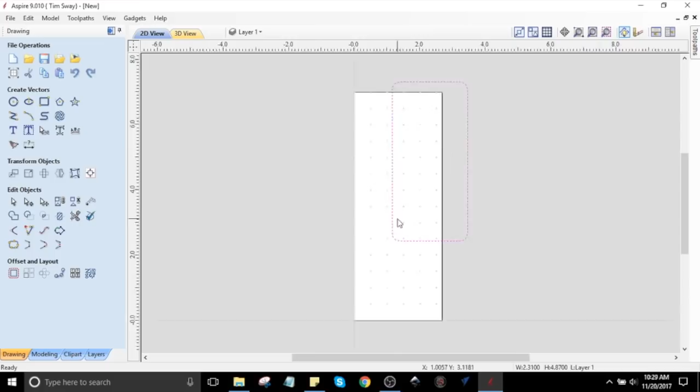Ideally, I want to be able to use the newest version of Aspire to its fullest potential and do 3D carving on two sides of the same piece of wood.

I started simple by modeling an iPhone for my 15-year-old niece Hillary. I thought I would just get the dimensions offline and make a very simple shape, some very mild cuts, and give her something that she could hold instead of the real thing to give it a break every once in a while. And I used this piece of wood, which is a piece of reclaimed decking furniture, I believe it to be teak, that I had gotten from her father.

So it was a pretty simple model, really too simple for what I'm trying to do, but it was a good place to start. I put my wood in, I set up that little fence to line it up and find my zero, and just started carving.

First I did a rough cut with a 1/4-inch end mill, and then I switched to an 1/8 ball nose end mill to do the detail work. I then also used a V-bit to carve in some initials.

I left some tabs that I could just cut with a razor blade, and I was able to pop that piece of wood right out.

This wood was a little too light and too splintery for this. I tried doing some repairs on it. There was a spot that chipped and sanded it up, and it came out okay. The file worked properly and it all looked good, but it was a little too light and a little too thin. I wasn't happy with it. I thought she needed a more substantial piece of wood that would make it feel more like an iPhone. I finished it anyways.

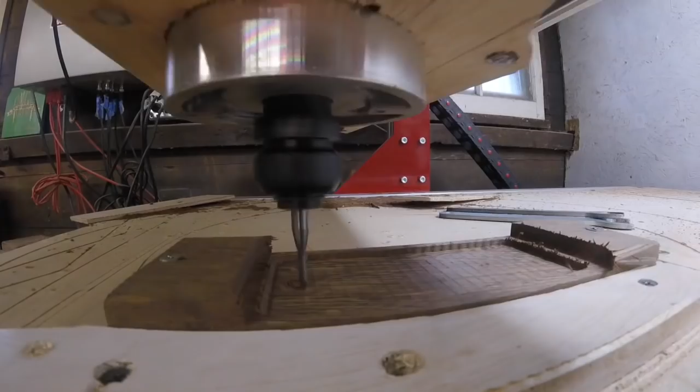And then I dug into my pile of wood I got from my friend Dylan, whose father was a guitar maker, and he gave me a bunch of these little just pieces of exotic wood. So I don't even know what this is, wenge or something, I'm not really sure, but it was just a little denser and firmer, and I had this piece that was pretty much the perfect size.

And I didn't carve the initials in this time because I didn't like the way they looked, but this denser wood came out a lot better looking. It feels more like an iPhone. There was no splintering. It was definitely worth doing again. You can see the difference here.

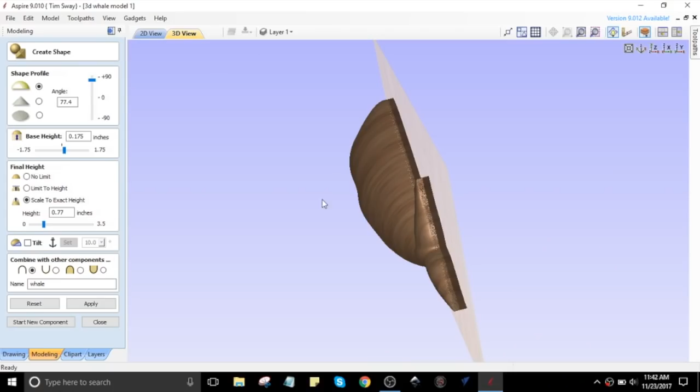Now it's time to move on to full two-sided 3D carving, and I decided to make a whale, of course. I found a very simple vector, just that outline drawing that you can see there online, and just copied that, and I decided to try and make that three-dimensional.

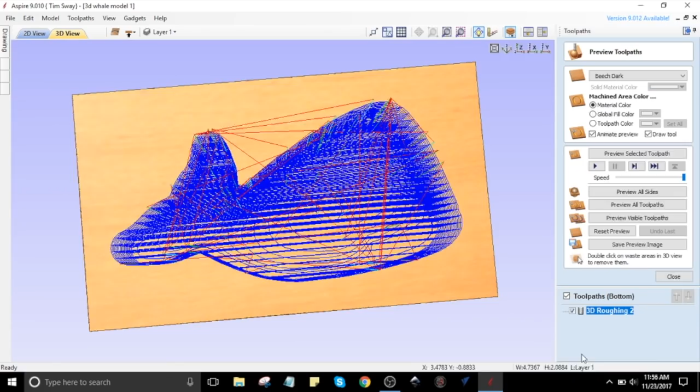It wasn't too hard to blow up the one side. Basically what I just did is created it all on one side and then mirrored it to the other. What I did have trouble figuring out how to do was to get tabs in there so it wouldn't just fall through and get it centered in the block of wood. As you can see, I was having a little bit of trouble there.

And I decided to use some of the boat wood that I got from Levi from the Ernestina. Since it's a whale, I thought I might as well get a piece of wood that might have actually seen a whale someday. I began to prepare the wood, and it was right about here that I realized I don't have to do it this way. I have bigger tools to handle the job, so I squared it all up with some electric tools instead.

Now this is where my inexperience with CNC really starts to show, and I start to make some mistakes, so pay attention. Maybe I'll save you some trouble in the future.

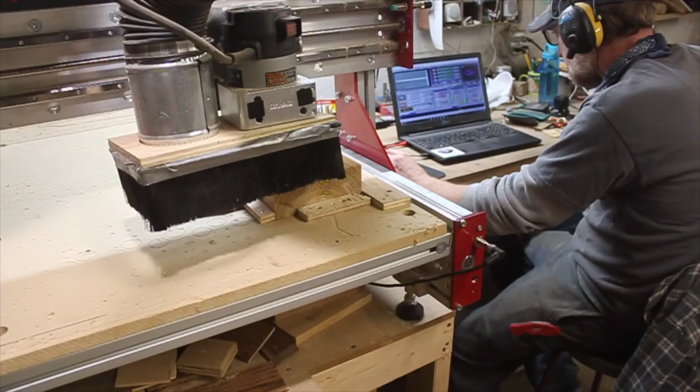First I created that little fence, and I used a little piece of two-sided tape to stick that in there, because I wasn't quite sure if I was going to have room to screw it down yet. I wanted to at least start cutting it before I popped any screws in, to make sure they weren't going to get hit by the router blade.

So I do first a rough pass where I use the 1/4-inch end mill to get it all roughed into shape, as you can see here. And now I know where I can put my screws, and I'm ready to do my final pass, which I use an 1/8-inch ball nose bit for, which then goes and does all the final detail and shapes.

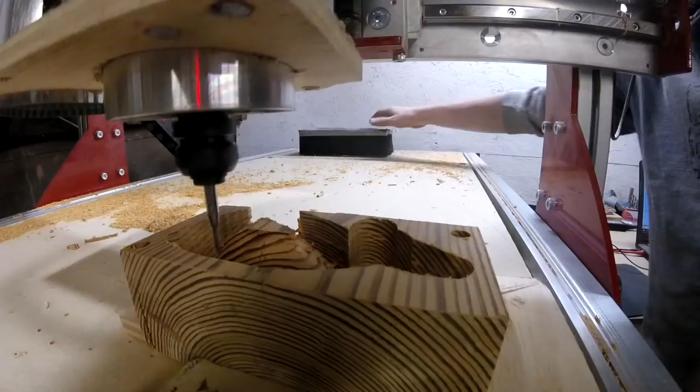I want to point out here that I'm not going to fully explain all of the problem solving that I had to figure out in the software, because there are so many better tutorials on the Vectric YouTube channel and other YouTube channels where they really explain how to use the software better. I'm trying to just sort of show the real world side of it. I'm not quite qualified to do that type of talking yet.

I just realized now that this block was supposed to be 3.5 inches, not 3 inches. And I thought it was interesting how it was cutting off here because it didn't on the model, but that's okay. The only thing it affected was my tab. The whole sculpture still fit inside.

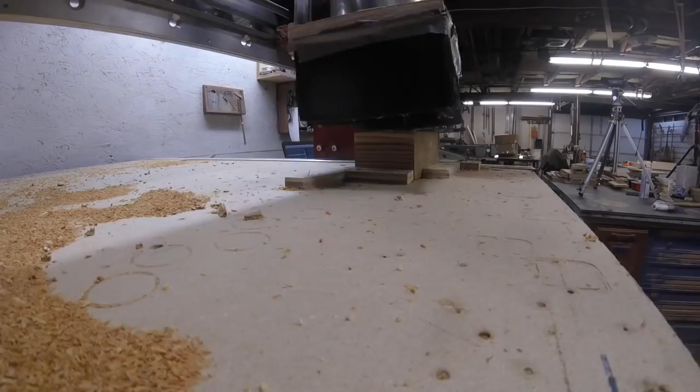This is a trick that I learned from Vectric, because if you drill those 3 holes into your block and then you drill them again into the wasteboard in reverse, you can flip the wood upside down and it will perfectly line it up. So I've got that down, but here you'll see in a second where I obviously didn't have my tabs right on my whale.

And as I'm starting to do the final cut on the second side, there it goes, it breaks free, and now I'm just cutting air. But I don't know this, of course, because I'm not watching.

I just walked over and realized that this is the first side, and then it fell. The tabs I made weren't big enough to hold it in place, and it just completely fell. So I've been cutting air for the past 10 minutes.

So I tried again. I made bigger tabs, and you can see that one was kind of useless, and those actually kind of worked. But then what I also did is I just sort of fudged my depth to give myself a little bit of wood here that I could then cut out on the bandsaw and play it safe, because I have to sand the tabs in anyways. I might as well sand all that in.

But what I'm thinking is, what I just did is cheat, and I figured out a solution by using hand tools, but I didn't actually figure out how to use the software properly yet, which bothered me. But I moved on to the good wood anyways, thinking I might have it figured out by the time I was ready to do that.

So this is some really beautiful red mahogany that's reclaimed also from the Ernestina. Thanks again, Levi. And I wanted to make the whales out of this.

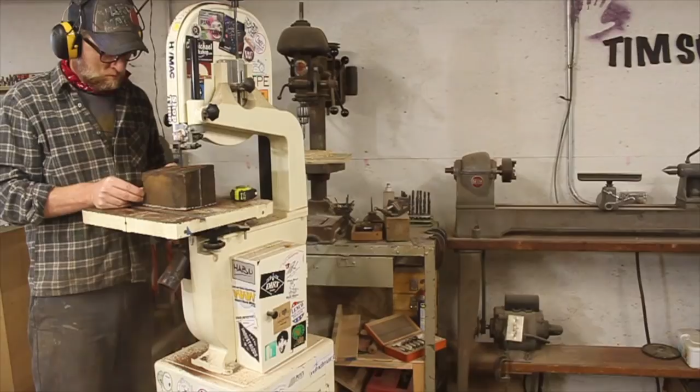And right about here is where I start thinking how people say using a CNC isn't real woodworking. I don't get it. I suppose if I were making everything out of plywood, which I think some people think the CNC is, I could understand that. But as you can see here, and what I'm trying to show in this video, is that it's just another tool in the shop, man. CNC is absolutely real woodworking, and it takes a real woodworker to use it. Actually, maybe even like a real woodworker and beyond.

I switched to hot glue this time to see how that would work as I glued my block in, and started trying out my file. Now remember, I haven't fixed it yet.

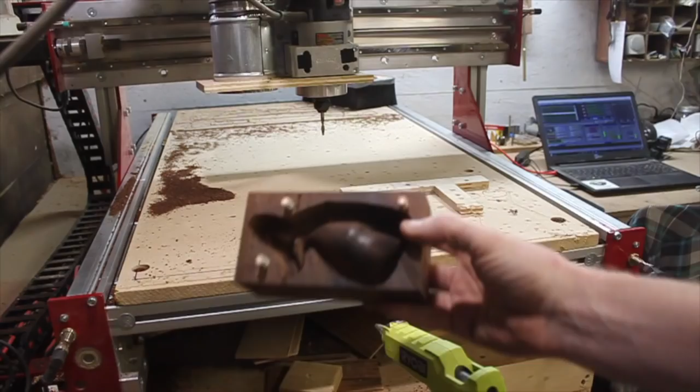The first side came out great, and you'll notice I used the hot glue on my work instead of on my bench, so I could scrape it off the work and not mess up the level of my table. There's my upside down dowel trick, a little hot glue to keep it in place, and some wood pushed around it to hold it still. Now it's time to cut out the second side.

Moment of truth. Well, once again my tabs weren't strong enough and it just broke, so I need to make a much larger tab, or find some way of supporting it, which doesn't really work. This 3D carving stuff is tricky.

This side looks beautiful though. Maybe we'll just make it a 2D thing and hang it on the wall.

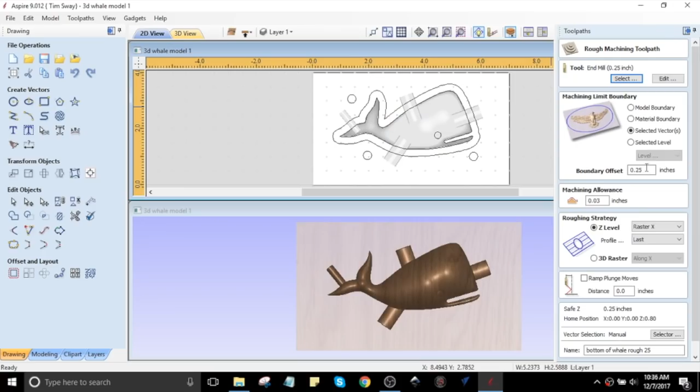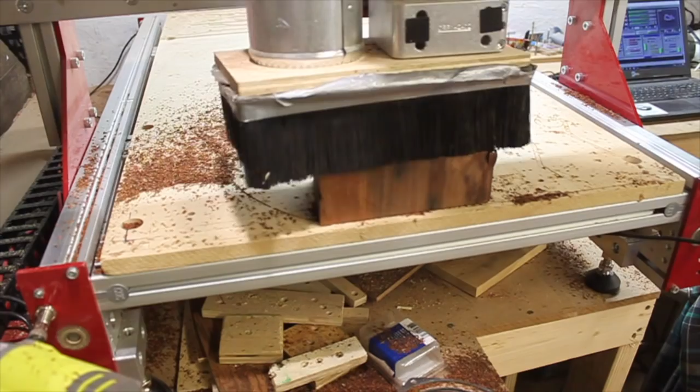Todd explained to me that my tabs weren't long enough. I needed to create an extra outside vector around the whale to really isolate the area I was going to cut, and make sure my tabs went beyond that, so they didn't just get cut out and end up getting rounded over in the profile. Since the tabs were getting added on, they were becoming part of the profile, and I was actually cutting my tabs out. I fixed that, tried again, and my depth was just a little bit off.

This looks good. There's just a very thin layer of wood here. I'm going to bandsaw that right out.

I was off. Oh man, I was off. Because my guess is that I must have screwed up these holes when I was going back in and editing the file. I bet I didn't line those up right.

Son of a monkey. God.

Now I'm determined, so this time instead of squaring it all up on my traditional power tools, I strapped it right down to my table, used my square to set the depth of my router bit to make sure it was exactly the same as the file, and then I manually drove the router bit back and forth to square off my wood cube to the table and the router, so now I know my depth is going to be perfect.

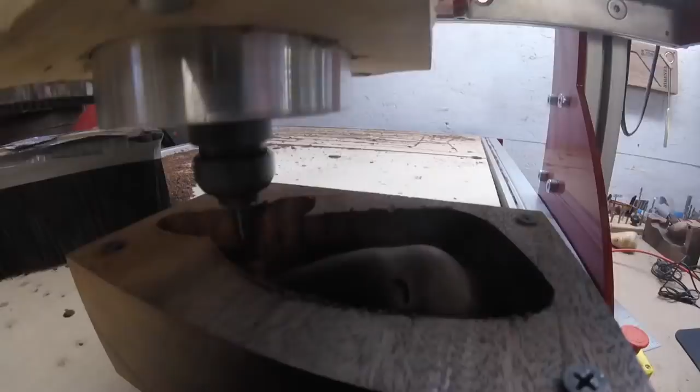I fixed my dowel marking holes and went through and made a whale. It looks so cool in there, I almost don't want to take it out.

Finally, I figured it out.

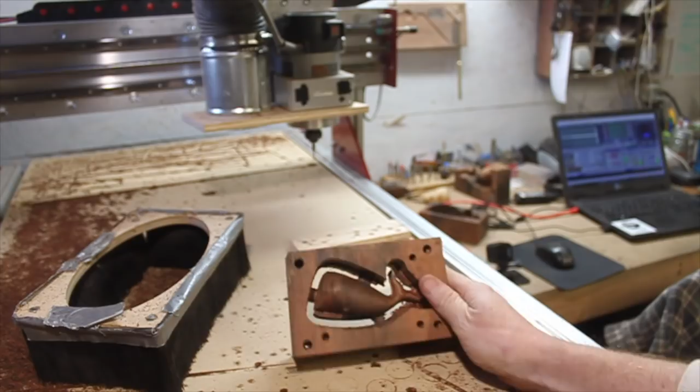I just had a couple little tabs to snip off on the bandsaw, which was easy, and then I sanded them off and finished them with a little hand sanding and some beeswax mixed with linseed oil, and that's some local beeswax, so I think that's kind of cool.

I intended to make 2 whales, one for my wife and one for her parents, my in-laws, and I ended up having a few extras that I did some fun stuff with, some of the failures, because they're still cool.

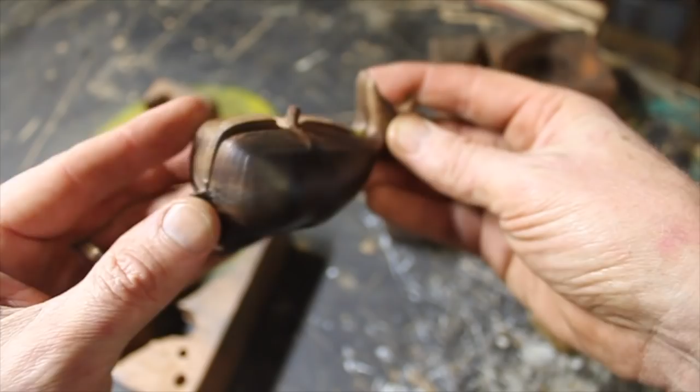Well, I sure learned a lot. I hope you did too, or at least enjoyed watching this.